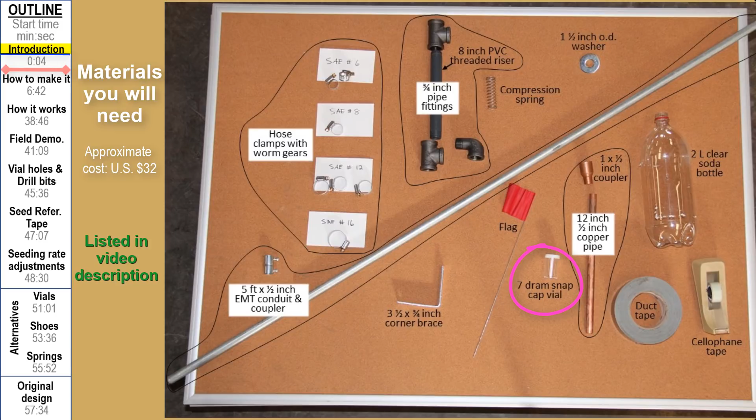Now, the materials that we're going to use to make this planter are pretty basic. They're things that, for the most part, you should be able to get at a really good hardware store. There's a few things that are little specialty items like these vials, but most of the components are pretty basic. The tools that you'll need are pretty simple. They're basic shop tools, hand tools.

One really important thing that I should mention is that this video actually accompanies a paper in the journal HortTechnology. And I wrote that paper to describe this seeder. But I thought it would be helpful if there was actually a video that showed how to put it together, because sometimes it's a little bit hard to understand from a written document how to make something. I know personally I'm a visual learner, and so I thought that having a video might help you to put one of these together as well.

So let me just check to make sure I haven't forgotten anything here. All right, so let's go out to the shop. We'll do those parts that we need to work on, and then we'll come back in here and put it all together, and then continue with explaining some of the cool features of this slide hammer stick seeder. Pretty cool.

Okay, so let me show you how to connect the seeder foot, this angle iron down here at the bottom. And then I will show you how to make this slightly crimped area here, which holds the EMT coupler and the hammer stop washer right there. And then lastly, I'll show you how to make the seeder shoe, this copper piece at the bottom. Okay, so we'll start with the easiest one, the foot.

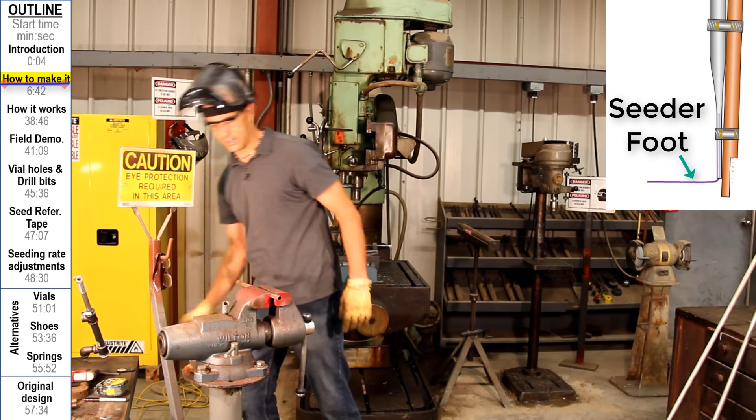Okay, so let me put that one down there. All right, so to get the foot to go inside the tube, all you need to do is basically slightly crimp this so that this will slide inside there.

Let me just switch out my glasses. The other ones are a little better. All right, let's do that. Hang on.

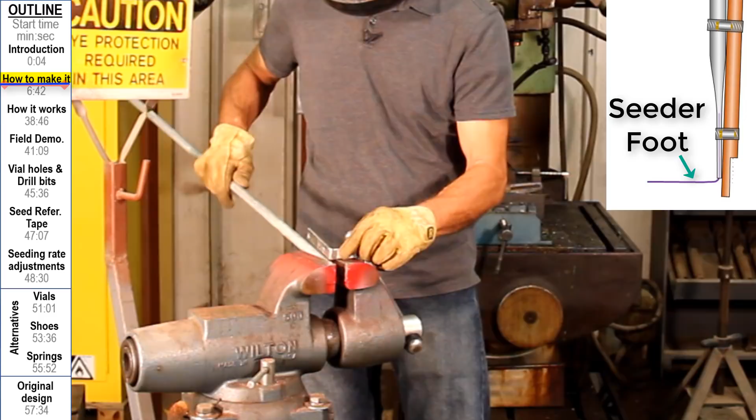All right, so I've got my piece of tubing right here, and I'm going to put this inside the clamp. And I will put it in the clamp about up to the same distance as this is long. So you don't have to go more than that. Put it like that. And then, see, if I don't crimp this a little bit, it's not going to go inside there. So then I give this a little bit of a crimp. And I keep testing to see if it'll fit in yet. Got to go a little bit more.

Okay, so now it slides in there nicely. So you can see that slides in and out of the end of the EMT tubing. Now, once you've got that to where it will slide in and out, sorry, once it'll slide in and out, then we're just going to crimp it in there a little bit better so that it doesn't come out at all. And we'll do this several different locations. Okay.

So it does feel like it's holding in there now pretty well, but I need to crimp it a little bit better. Okay, that's doing pretty good. Let's get a little bit more on the end. Flip it over. Do the other end part. All right, that looks pretty good.

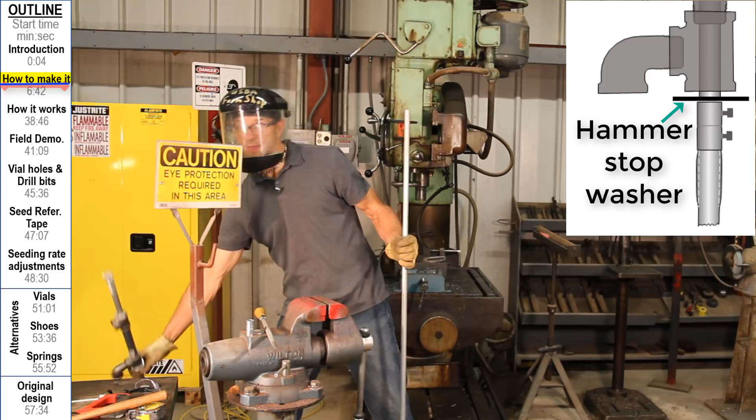All right, now we're going to work on this center section here, which is where the hammer stop washer is. So we need to put the EMT coupler down there, and then we are going to put the washer over that. So what you'll notice when you get these couplers is that the coupler from the store is not meant to slide down on these. These are actually used to connect two pieces of pipe together. And they don't go all the way down because they've got a ridge in the middle.

So what you need to do is take your coupler, stick it inside of a vise like this. Don't over squeeze it, just slightly in there. And then file out the inside using a file like this, okay? So I already did that with this one. So this coupler will actually slide down over that.

And I've made a mark down here. There's a mark at 1 meter. That's where I want my washer to be, so that the hammer stop washer is right there on that 1 meter mark.

Now the washer size that I'm suggesting you use doesn't quite fit over the EMT tubing. The inside diameter of the washer is a little bit too small. So you need to put this in your vise and then use your file to file that down just a little bit. And I've already done it with this one, so I filed this down just a little bit. And you can see this will now fit over the EMT tubing.

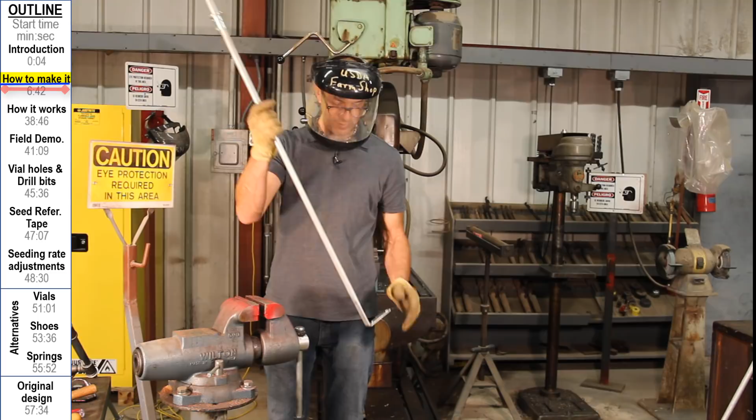Now the washer might still be a little bit loose, that's fine. It doesn't matter if that moves because it's going to get hammered when the slide hammer slides down there anyway. When this action is happening, that's going to hold the washer in place. All right, so we've got our foot on, we've got the center part crimped, and now we're going to do the last part, which is, not the foot, but the seeder shoe.

Now what I would suggest you use is the blue type copper, and that blue type copper is a little bit thicker than the red one. Remember, this is what we're trying to produce, something like this. If you look down here at the end, you can see this has got a nice V or U shape. And I've got my mark 1.5 inches up from there. Now this one I actually made with the red type copper, which is a little bit thinner. It'll be fine, but I think the blue one should last a little longer.

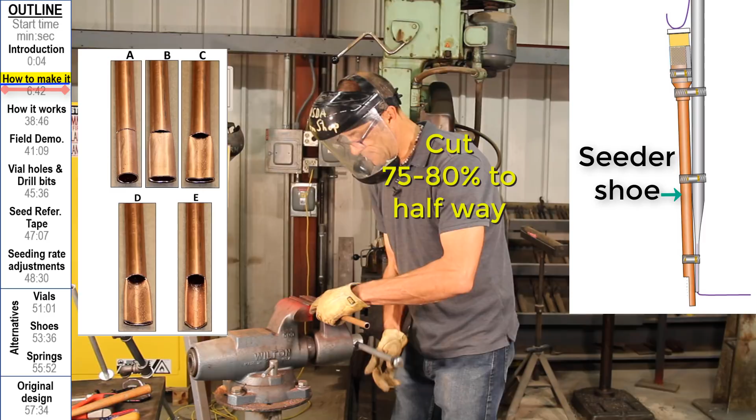Okay, so I'm going to stick my pipe in there, and I'm not tightening it too much, just a little bit. Critical thing now is you're going to cut this at about 1.5 inches up. You don't want to cut more than a little bit less than halfway through. So I want to cut just a little bit less than halfway through the pipe. The reason you don't want to go too far is because this end piece won't be as strong if you cut too far through that.

So I'm going probably, I don't know, maybe 75% of the way through, or maybe 80% actually. All right, so that looks pretty good right there. So it doesn't take very long. Okay, so I've got my little cut there.

Now what you're going to do is orient this so that it's lined up correctly in your vise. When I say correctly, I want to make sure that the cut isn't too much this direction or too much that direction. All right, so let's see here.

That looks pretty good. Just a little bit. And I know you may not be able to see this clearly through the video, but the cut is just slightly above the top of the vise.

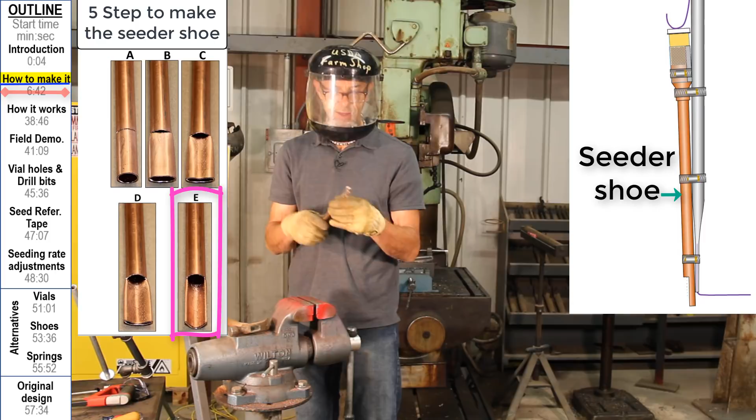So ideally, when you're done, it'll look, actually that looks pretty darn good right there. I think I might bring it in a little bit more. But ideally, when you're done, you can notice that the area that you've crimped is pretty much in line with the rest of the tube. Okay? Sometimes you might want to put it on here, just give it a little crack like that to bring in the V a little bit more. All right, so that's looking pretty good. I like how the shape looks. I'd say it actually might be a little better than the other one that I made earlier.

Now, one last thing I want to mention is that the area right in here, right in the center there, we want to make sure that there's not a gap. Remember, the seed's going to fall down the tube here, and we want to make sure that seed doesn't somehow go behind the back of this and get caught in a little air space in there. So what I like to do is take a punch like this and go in here and just make sure that I've crimped it really nicely down there.

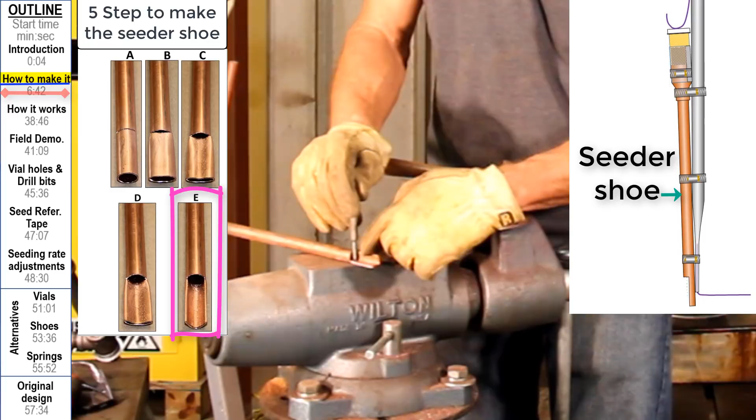So it's not hard to do. Just take a flat-ended punch like this one, put it right in there where the V is, and then give it a hit. Okay. Okay, so again, I'm just going right into this section here and just making sure that the tubing is really crimped together right there. You can actually go all the way along that edge.

Now, when you look down the tube from the other end, and I realize you can't see that from where you're at, but when I look down there, these two pieces of tubing that I crimped together are nicely closed. There's not like a big old air gap in there. So that's pretty much it. We've got our tube for the seeder shoe made.

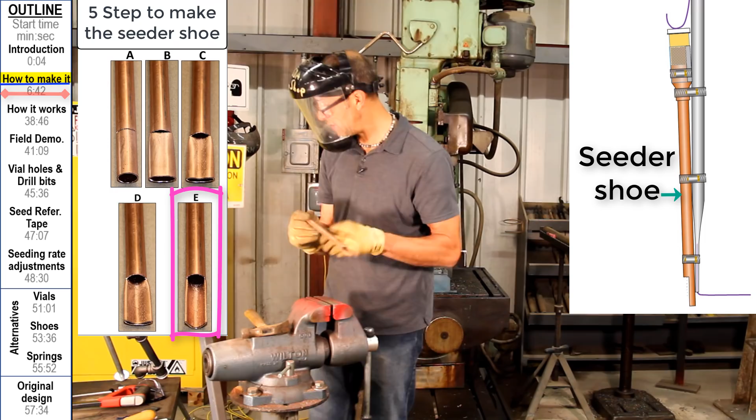So this is going to go right down here at the bottom, okay? Okay, so now that we've got this part of it done, the foot and then this hammer stop washer, let's make one more piece and then we're going to pull all this together and make our slide hammer planter. So what we need to do is we've got our shoe that we just made. We're going to take that reducing coupler and just put it on there by hand, all right?

And now our seed vial needs a way that it can stay on the top here of this. And what we're going to do is we'll take a small piece of high density polyethylene from a soda bottle. The dimensions are right here, 2 inches high by 4 1/8 inch, this direction. And I cut it out of the bottle, and so the bottle was oriented this way.

And what we're going to do is we're going to take this and wrap it around our reducing coupler, get the edge here lined up. Then we'll take a little bit of tape, just cellophane tape, and we're going to just temporarily hold that together. Okay, so that's just right at the seam, okay? Now you can see the seed vial slips in there perfectly.

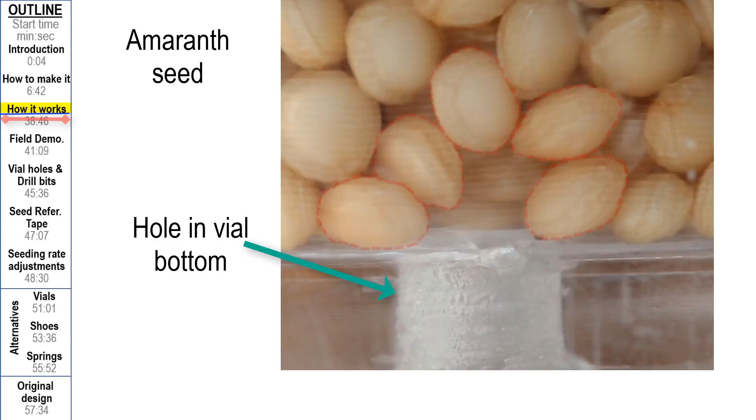Now if the hole in the vial is too big, of course the seed's just going to pour out the bottom. But if the hole in the vial is just large enough to allow seed to flow through it, but also small enough to allow the seed to form a bridge above the top of the hole, then the seed won't do anything until the slide hammer disrupts that bridge, and then a few seeds just above the hole fall through the bottom of the hole.

Now, one thing I should mention, in most cases, this concept of bridging or arching of materials above a hole in an agricultural tool, like a piece of equipment, it's a problem. For example, if you're fertilizing a field with fertilizers, whether they're organic fertilizers like pelleted chicken manure or synthetic nitrogen fertilizers that have been pelleted, what you don't want to have happen is for there to be a bridge that forms right above the hole that dispenses the material. You want that material to keep moving through there.

But ironically, with this seeder, we actually want the bridge to form. We want the bridge to form until we strike the slide hammer down, and then it disrupts that bridge and allows a small amount of seed to flow through there. So in a nutshell, that's how the seeder works, is that we've got these bridges or arches that form right above the hole, and the seed won't flow out of there until that is disrupted by the hammering device.

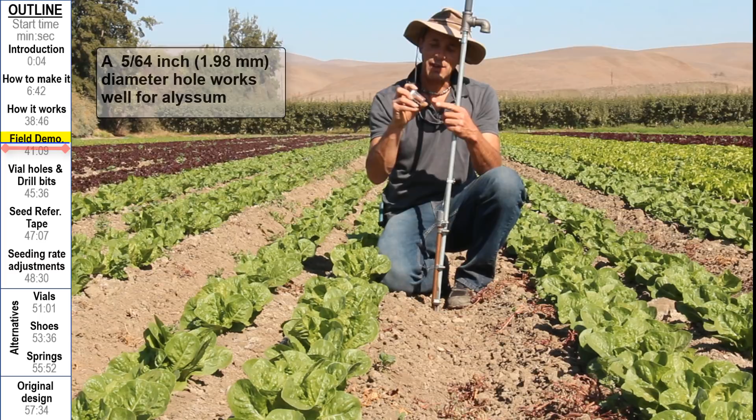So what I've got here is my vial, and this is the vial that's specific for sweet alyssum. I've got the appropriate hole size in the bottom, and I've got about 1/2 or 3/4 of a vial full of the raw seed. I'll put it in the top of the extension tube there on the seeder, and I always like to check and make sure that I've got alyssum seed coming out the bottom, and also that my seeder shoe depth is set correctly. Okay, so I'm not going to go very deep on this field, but this should work fine just for demonstration purposes.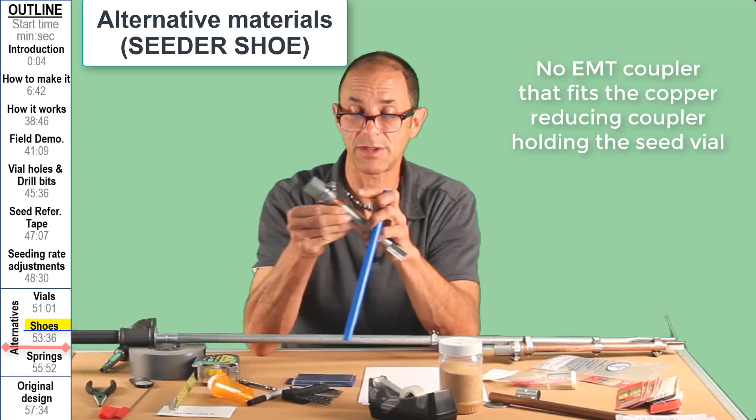And so you might be able to figure something where you just tape this on there, I guess. That would be an option, but I actually found that having the copper on here makes it a little bit easier to connect a smaller tube. This copper is slightly smaller than the EMT. It's a little bit easier to connect a copper tube to the EMT than to use an EMT seeder tube connected with the actual EMT handle.